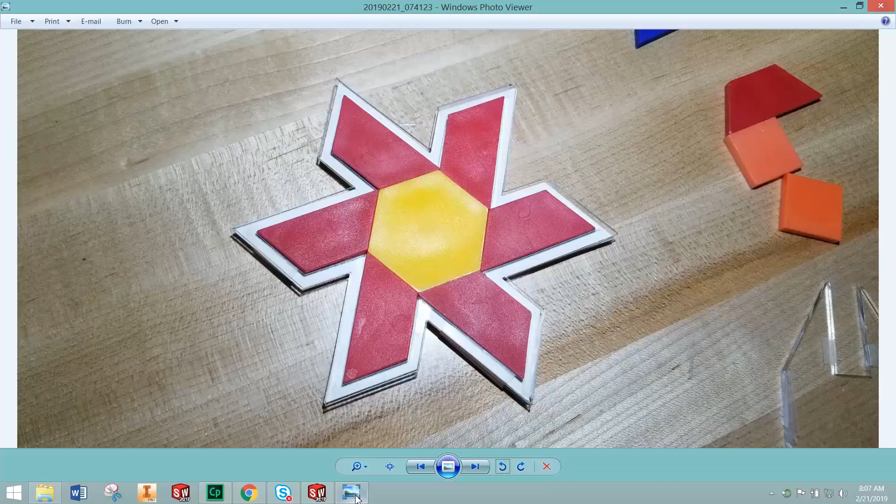We started this project a few days ago. We are using these pattern block colored geometric pieces to create a 2D puzzle that has a background and a border or outline, where somebody will be able to take your different pieces and figure out how to make them fit inside of your template to create the overall design you selected.

Here's the beginning of my example. It is supposed to be a flower, but I cut it off short, so it doesn't have a stem or any leaves on it. It should be missing some green parts for the stem and leaves, and I'll show you that in my example as we walk through how to do this.

You'll then use this picture, and some parts you'll download and assemble in SolidWorks, to create a background or base and an outline or border. These make up the two separate pieces you're going to design and laser cut in this class to create your pattern block puzzle. Your pieces will fit inside the border or outline and on top of this background.

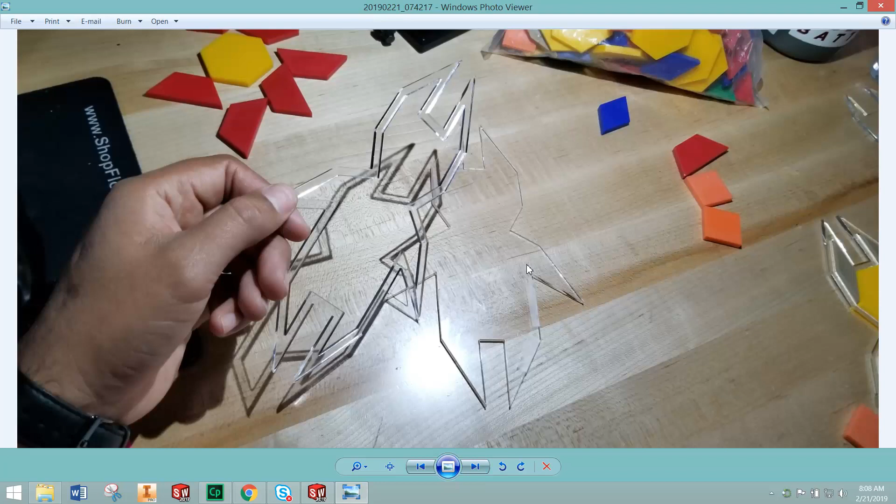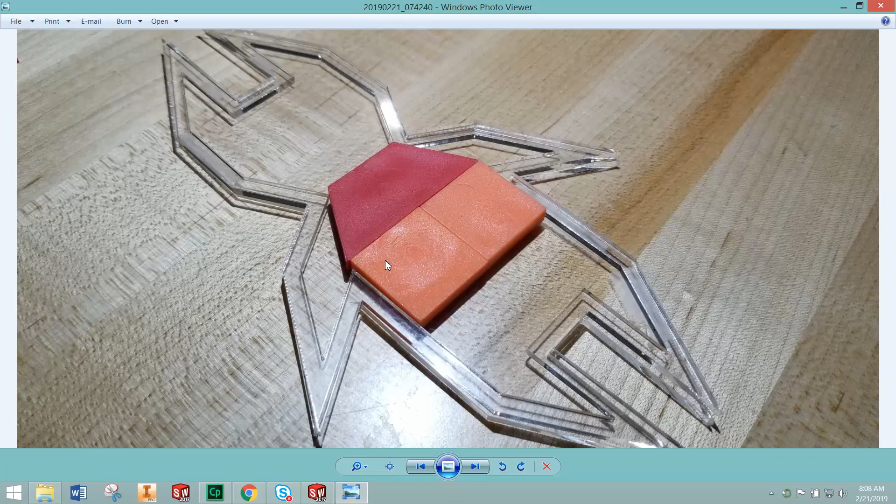Here's another example. You can see two different pieces. On the left hand side in my hand is the outline or border, and it has the same exact overall profile or shape as the base plate. These will be attached on top of each other to create the overall puzzle, then handed over to somebody to try to figure out your puzzle and how to make the pieces fit inside it.

To get started, one thing you'll need to do is go on GrabCAD. If you're in my class, you should already have an account on GrabCAD, G-R-A-B-C-A-D, grabcad.com. It's an awesome CAD, or computer design, file library with a bunch of different things.

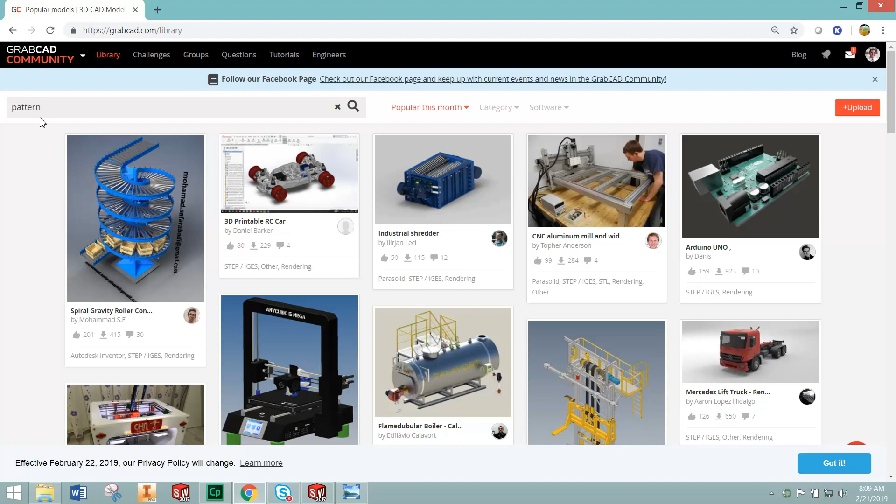One of the things on there for you guys, which you'll find if you search for pattern block, is these two sets of files that I have made available for people to download on GrabCAD.

One quick tangent: when I first put these up for you guys, this tan or beige diamond actually had the incorrect angles, and I uploaded it again. If you are going to use this tan or beige diamond in your design, make sure you download the separate file called pattern block diamond.

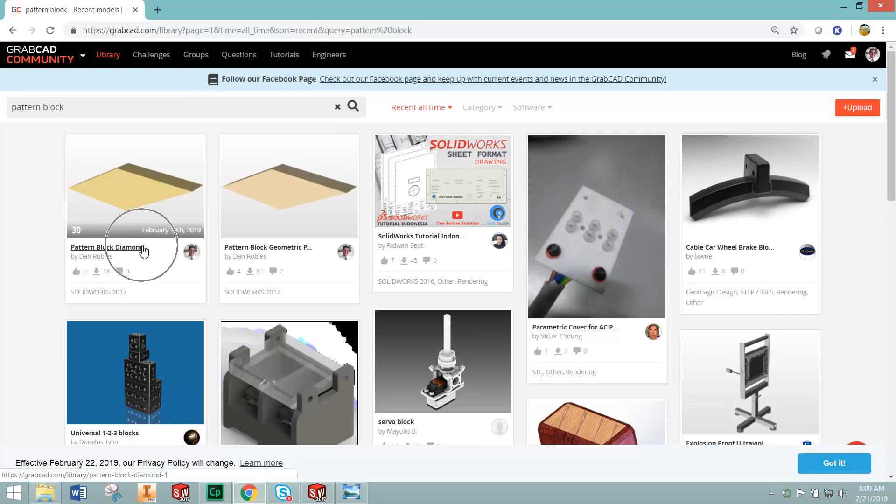Right now we're only going to worry about downloading these pattern block geometric pieces. When you go to this on GrabCAD, you'll notice I put a couple of instructions or bits of information on there.

One is that these are all sized the same, like every side of these pieces — one side of a square, one side of a rhombus, the side of a triangle — every individual side length is 0.972 inches. These are supposed to be a nominal 1 inch, but they actually measure about 972 thousandths.

We don't have to worry about that any further, because we're actually going to use these pieces in SolidWorks to create your design.

So you're going to be downloading these. Make sure when you download them, you put them into a folder that you know the location of. Do not work out of your downloads folder.

In this case, I've just put them on my desktop for now, just to make it quick and easy. Do not do this. You should be putting them in a folder for this class, or for period 1 or period 2, whatever you want to call it, as long as you know where you're saving it.

In SolidWorks, we are going to be assembling these pieces. When you create a new file, you have the option to create an assembly, to create a part, or to create a drawing. If you're designing an individual part, you'll notice the icons, as I've shared before on SolidWorks, are very representative and illustrate what you're actually doing with that tool or task.

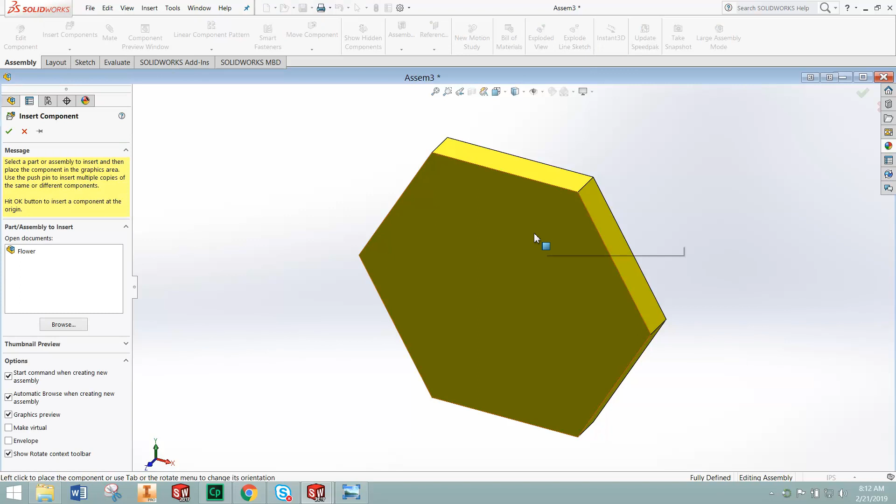The next part that I'm going to insert for this assembly is the red petals of my flower, which is made up of the trapezoid red piece from the pattern blocks. I'm going to bring that into my design.

You notice right now it's kind of just attached to my mouse. Wherever I move my mouse, that goes. I'm going to go ahead and click it somewhere close to where I want to put it.

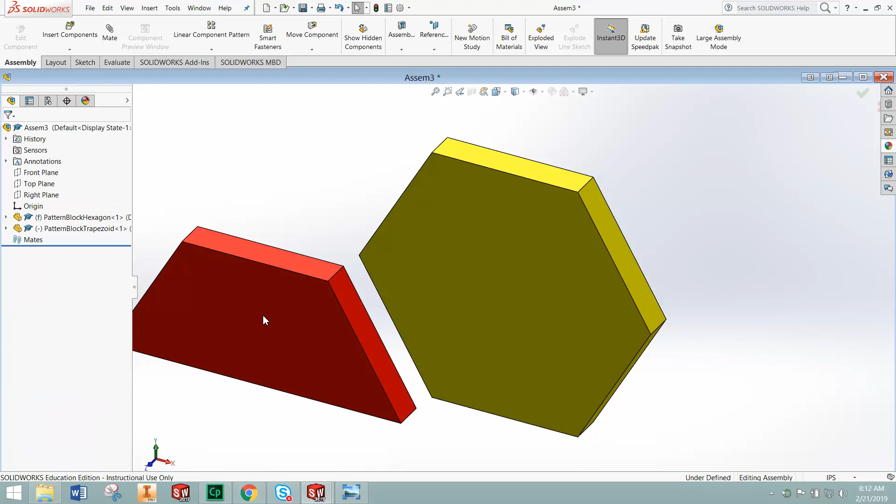Now the next step is to mate these, or attach these. This icon is super representative of what you're doing. You might have heard of a paper clip, used to attach different pieces of paper together, and we're going to use that quote-unquote paperclip tool, or mate, to attach these pieces together.

If I was actually holding these pieces on my desk in front of me, I would be bringing this face or surface of the red trapezoid over to touch this side of the hexagon to match those up to where I want to put it. That's actually what we're going to do in SOLIDWORKS.

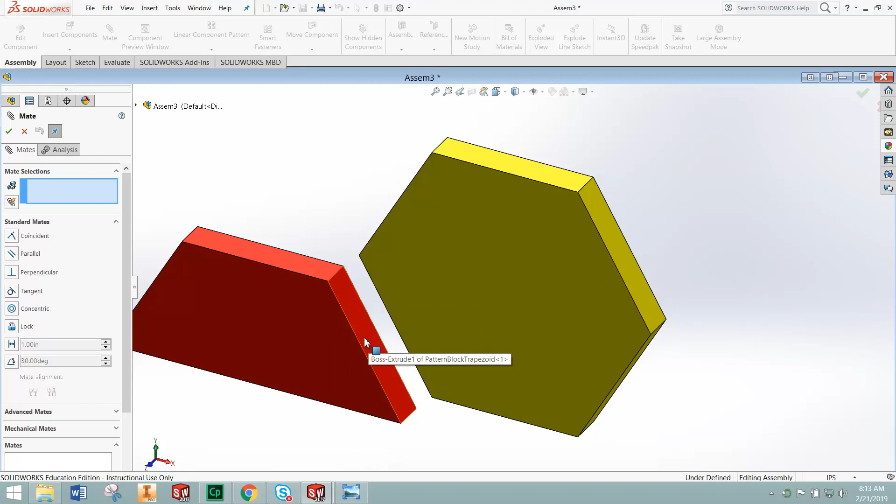So I've opened up Mate. It's up here, Mate. I'm going to select this surface, one side of one shape, to the other side of the shape on the skinny profile where I want it to go. Green check mark — so this is one mate.

Please keep in mind you always need at least 3 mates to completely attach any piece that you're attaching against something else, unless it is a cylindrical object. So that's the first mate.

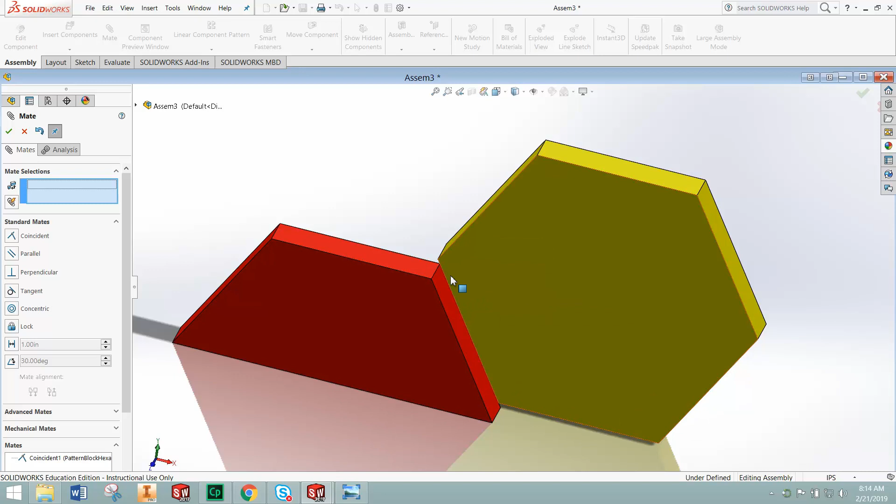Next I'm going to level out this surface with this surface to make those in line with each other. That is the second mate.

Lastly, I'm going to mate these two edges. I want these corners to be lined up, and you are going to do exactly that — line up those corners together, corner to corner. Make sure that you are selecting the edge.

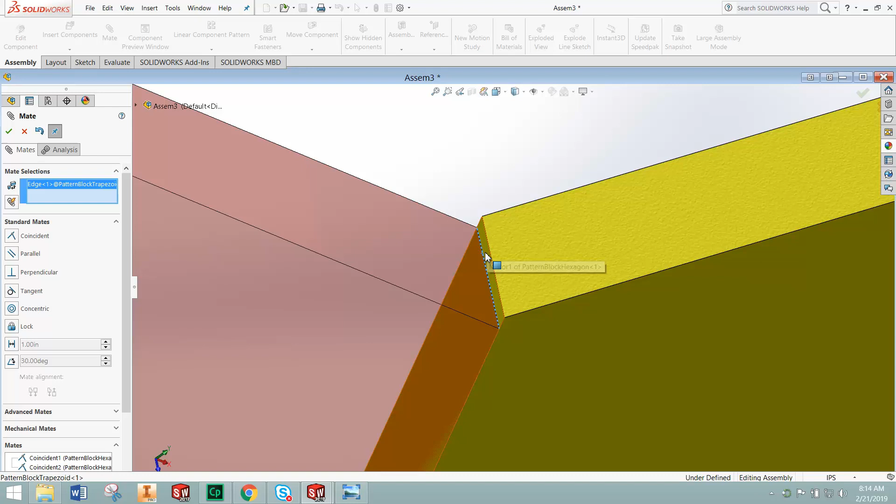Do not select a point. Do not select the point in the corner of the part. Make sure you are selecting edges. You can see here that whole edge on this part is being highlighted. So edge to edge — that is the third mate.

I can press the green check mark twice, and now if I look at my overall assembly, these two pieces are completely locked into each other and mated and can no longer be moved. If I try to move them, SOLIDWORKS will tell me this component is fixed, fully defined, and cannot be moved.

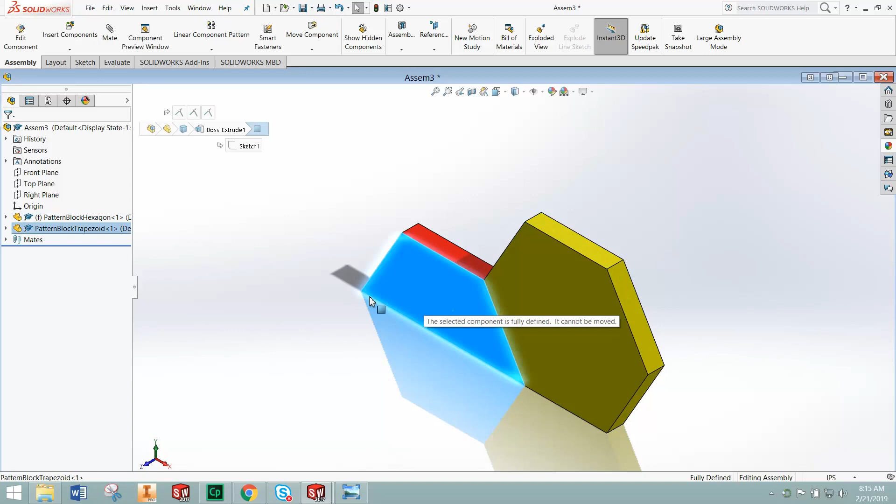You're going to repeat that process until you have completely assembled all of your pattern block pieces to create your full design. So here's my full design. I intend to create a flower. It is made up of 1 hexagon, 6 trapezoids, and 3 green triangles.

That meets my design constraints for this project: a maximum of 10 pattern block pieces and 3 different colors, and they are all touching at least one other piece to create one continuous shape.

Once you have your assembly done, please make sure you do this, and you should probably do this at least every few minutes along the way: click that save button. If you don't, and SOLIDWORKS crashes or your computer dies or you lose internet, you will not be able to save this. So make sure you are saving all the way along the process.

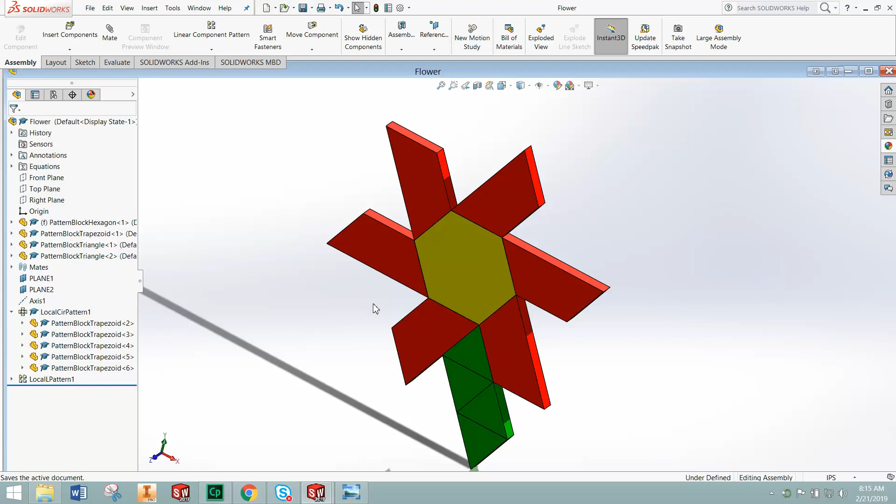Once you have your assembly done, the next step that we're going to go through to actually create your outline and then your background for your puzzle is to create a new sketch on top of this assembly.

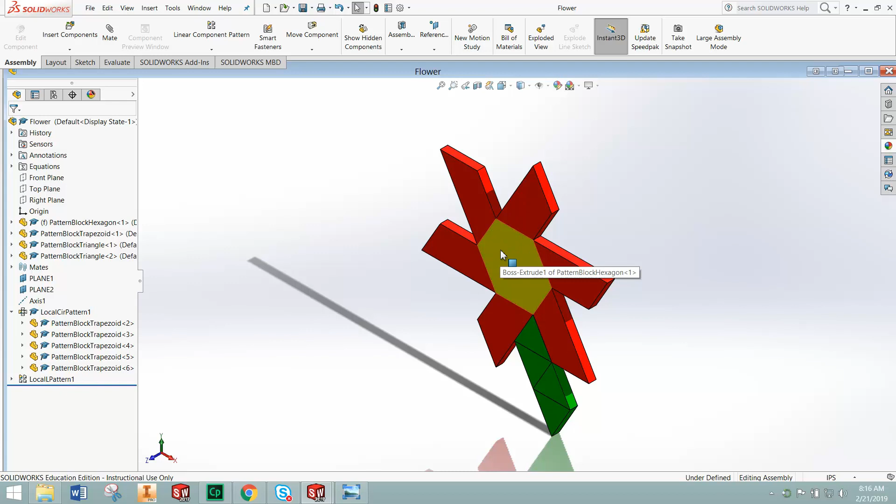So on the surface of any of these parts, you are going to right click, and then select this second button in the 3rd row. You can also left click actually, and it's the same menu that pops up. So it's the 2nd button in the 3rd row for sketch.

Make sure you are selecting a flat surface on one of these parts. So 2nd button in the 3rd row, sketch. I'm going to now, this is a hotkey, hold Control on my keyboard. It's next to like the Windows button, the top or bottom left corner of your keyboard.

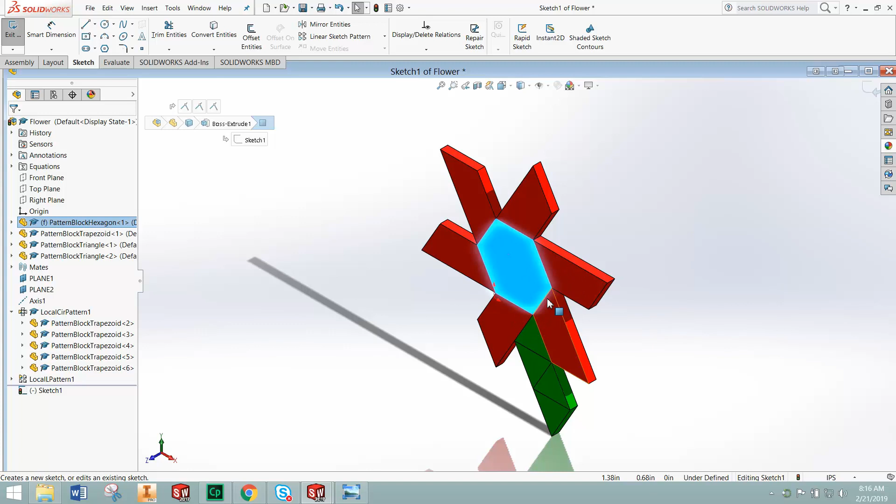So I'm holding Control on my keyboard and pressing the number 8. When I do that, SOLIDWORKS makes whatever I'm working with, in this case this surface I selected for the hexagon, flat to my viewing plane.

Once you've done this, you're going to trace the overall profile of this shape. The quickest way is to highlight all the surfaces of these parts and convert entities. The easiest way is to use the line tool, start on a corner, and work your way around, making sure the dot pops up on each corner.

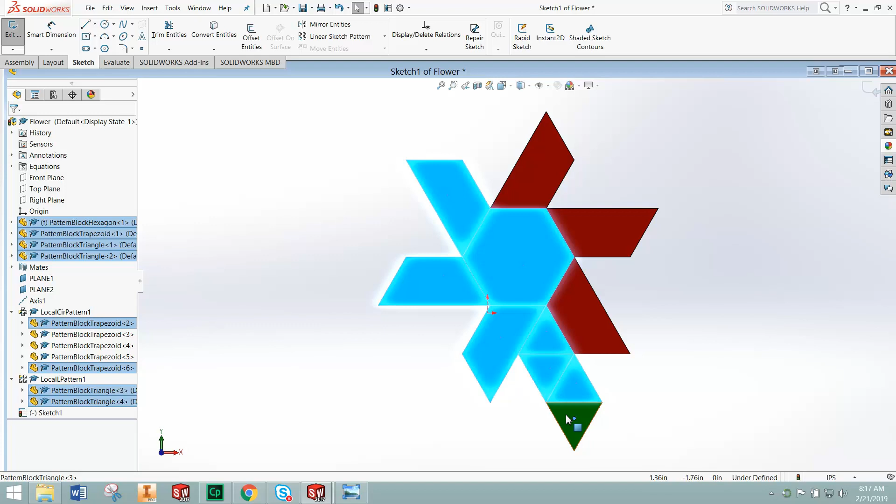For this video, I think it's going to take too long, so I'm going to do the shorter way. I'm going to hold Control on my keyboard and highlight by clicking every surface of every part in my assembly—not points, just surfaces. Make sure the surface is highlighted blue like this. I'm still in sketch mode, notice.

Then you're going to select, inside the Sketch tab, Convert Entities. SOLIDWORKS will automatically trace every single edge—pay attention to that—every single edge, not just the overall profile.

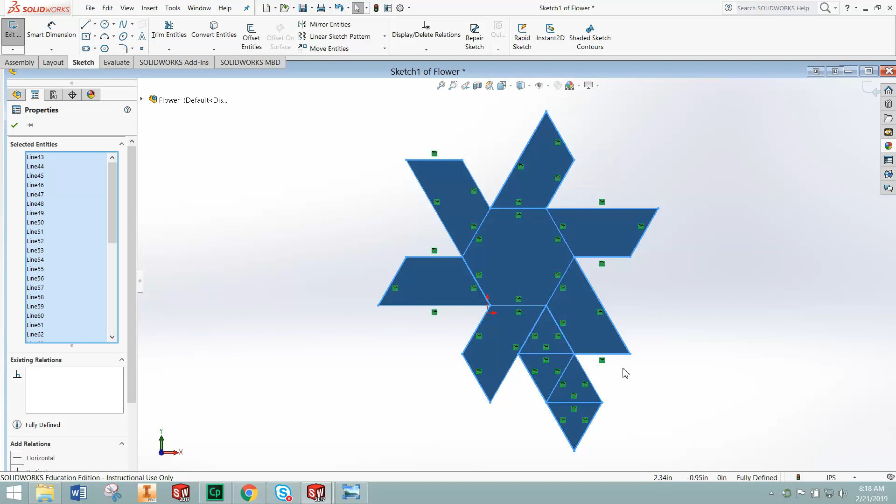So I'm going to copy all these lines that have been highlighted and turned into sketch lines. Highlight everything and press Control-C to copy it. SOLIDWORKS will say, hey, you can't copy solids, you can only copy your sketches. That's not really what it's saying, but it's what it means. You're going to say yes.

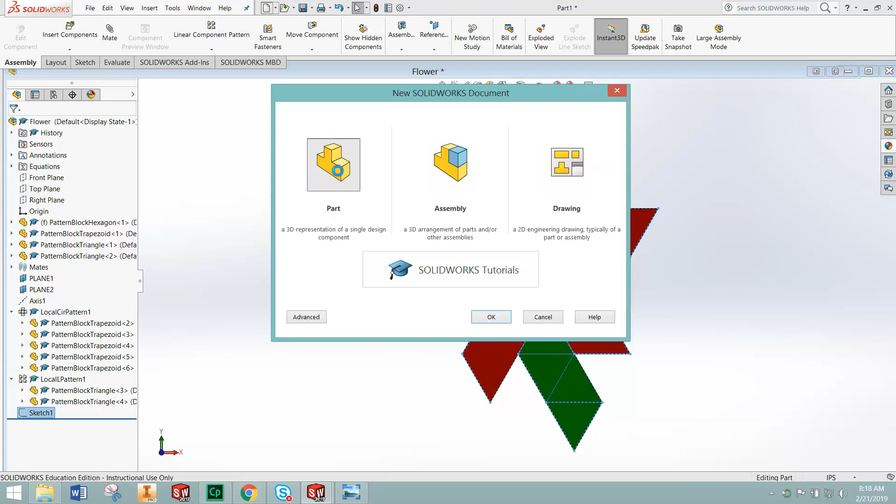You can exit the sketch mode with the green arrow in the top right corner, then go create a new sketch for a new part. When we create a new part, you're going to make a new sketch: pick the sketch button, pick the front plane, hover over your origin, and press Control-V. So there's everything I just copied.

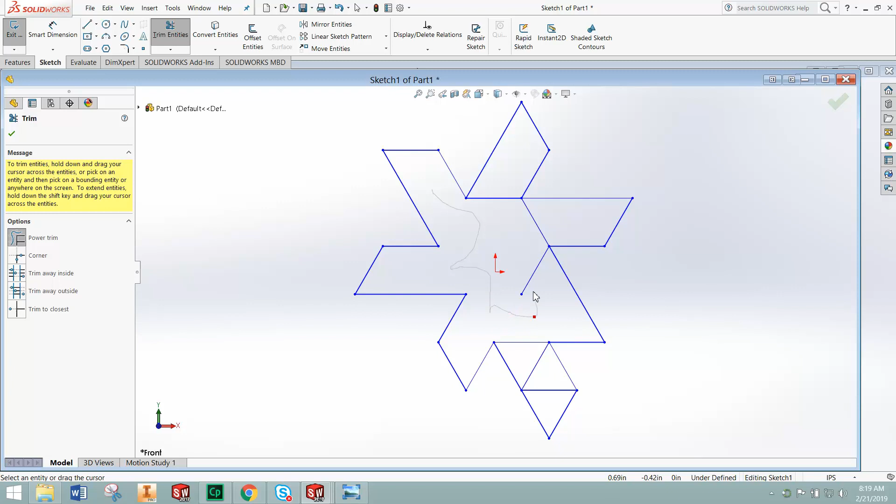Now, is this my overall outline of the shape? No, it has all these extra lines in the middle, and I'm going to get rid of those with Trim Entities—these little scissors. You click your mouse, hold it down, and slice through all the parts you don't want. Remember, we want to keep the overall outline of our shape, so I'm going to slice through all of that. Here's my overall outline. I'll press the green check mark back, and now I'm done with those parts.

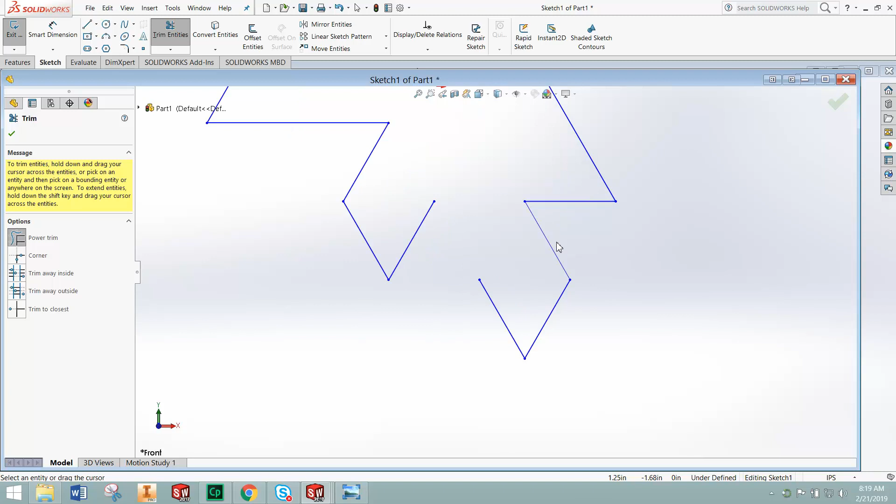Hey, look, there's a little gap here. I don't really want that. So I'm going to use Trim Entities again and get rid of those parts. I think that's the only place where that happened. I'm going to replace this line here. Okay, so I have the overall outline of my shape—kind of looks like a palm tree now instead of a flower.

And I'm going to go now to Features and create a 3D form from this with Extruded Boss. Once you pick Extruded Boss, you can click inside the shape if you want. Here's what you want to keep in mind: we are first making your outline.

Oh wait, there's one part I skipped that we can't forget. We need to give this some tolerance and extra space to make sure your parts fit. To do this, we're going to return to the Sketch tab and select the Offset Entities button. Make sure Chain is selected. We're going to offset, creating extra space of 0.01 inches all the way around.

So you click on a line—it's not picking everything, let's try that again. Offset entities, 0.01. Cannot create that off selected geometry. That's a shame. We'll continue for now, and I'll help you guys do that individually.

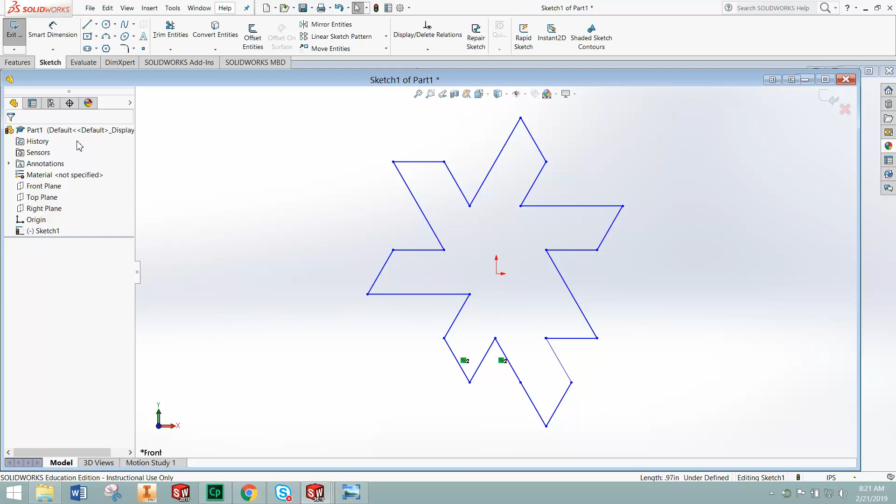So, Features tab, Extruded Boss. Click inside the overall shape. You're then going to select Thin Feature and make this 0.2 inches thick.

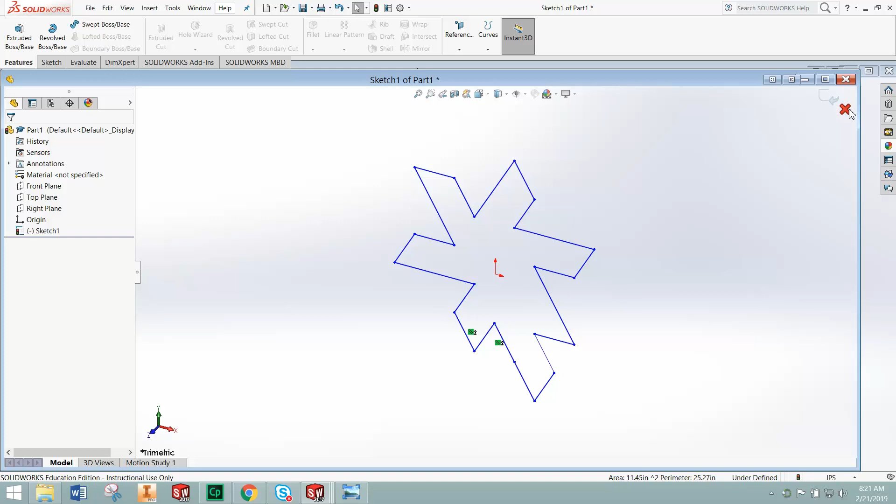Hey, something's going on here. Let's fix that—close this for now, don't save. We will delete that sketch.

Start a new sketch. We will use the line tool and trace the overall shape of our part—only the overall shape of the part, your overall perimeter or outline.

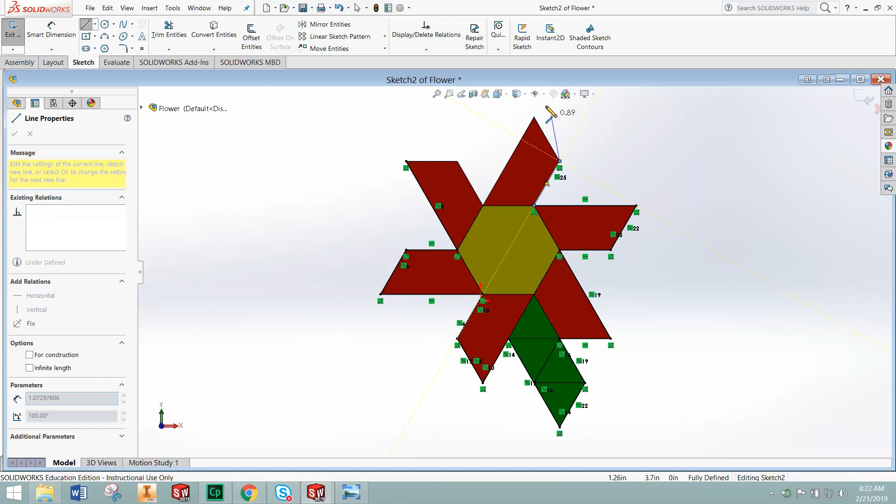So it goes to show, sometimes doing what should be the quickest way doesn't always work immediately the way you want it to, and sometimes you have to put in the work and make sure it comes out the way it's supposed to. I'm almost back to where I started, completely tracing this outline.

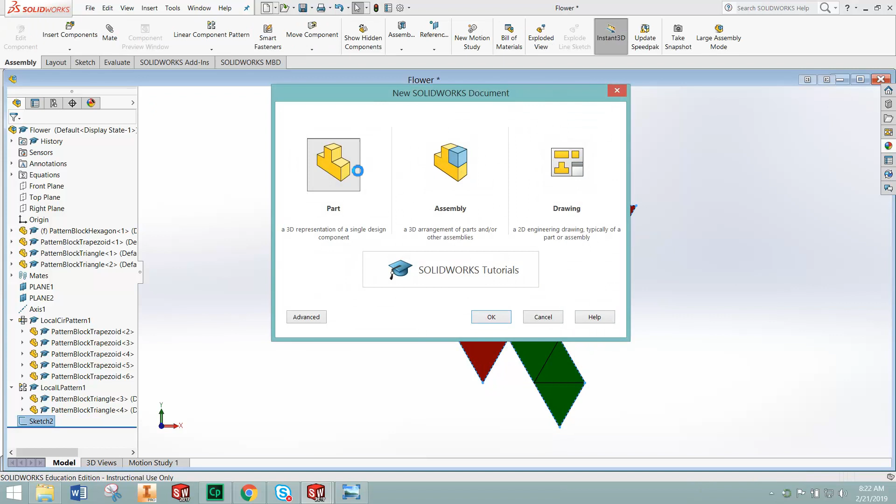There we go. I'll press escape on my keyboard, and now I can highlight everything. Control-C—again, still can't copy solids. Get out of that sketch mode, go start a new part with a new sketch on the front plane. Press Control-V, and we'll go straight to the Features tab.

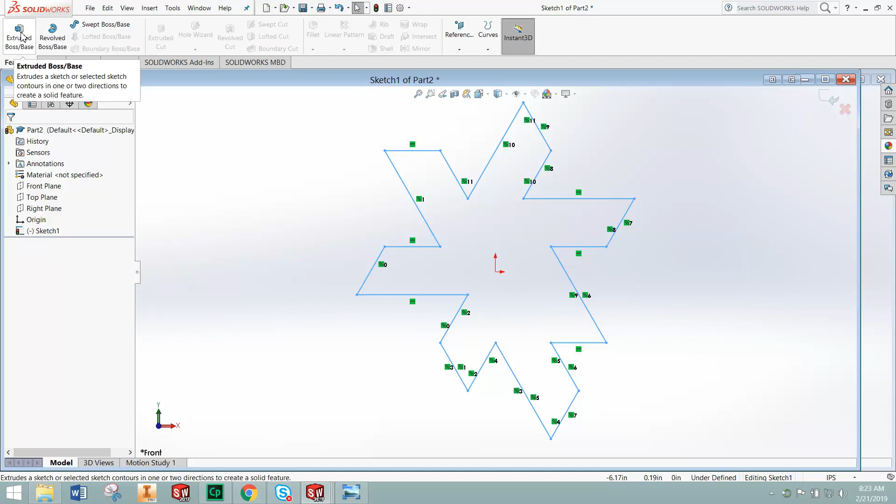So if you trace this line by line all the way around, it's always going to work. It takes a little bit longer, but as you saw, I just spent more time trying to make the shortcut work. So we're going to go straight to the Features tab, select Extruded Boss, Thin Feature, and make this 0.2 inches thick.

Green check mark, now this is done. This is the complete outline of your part, the border that is going to contain your puzzle pieces on top of the background.

So we are going to go ahead and save this file, save as. Make sure you're selecting save as. I'm going to save it on my desktop because that's where I'm working out of my computer for this example. And this is my puzzle outline.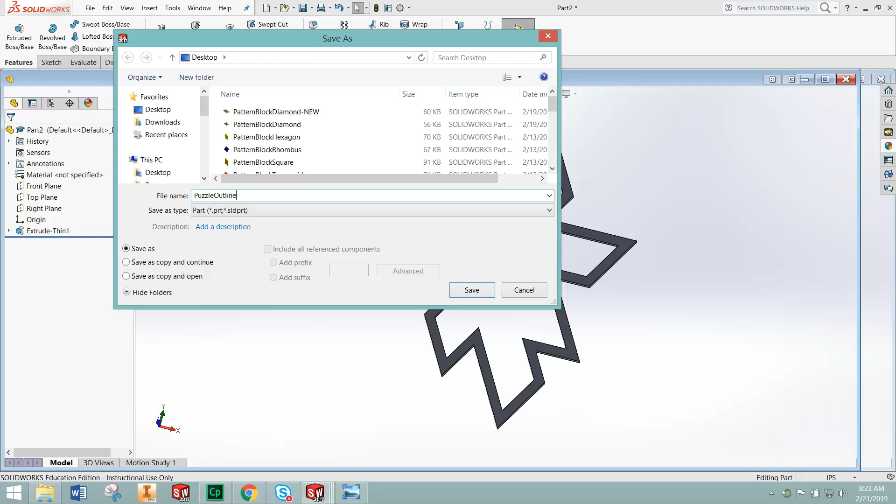That's done. Next, I'm going to use this same puzzle outline to create my puzzle background. Now the background has to be a solid shape, right? So make sure you're paying attention to this part here.

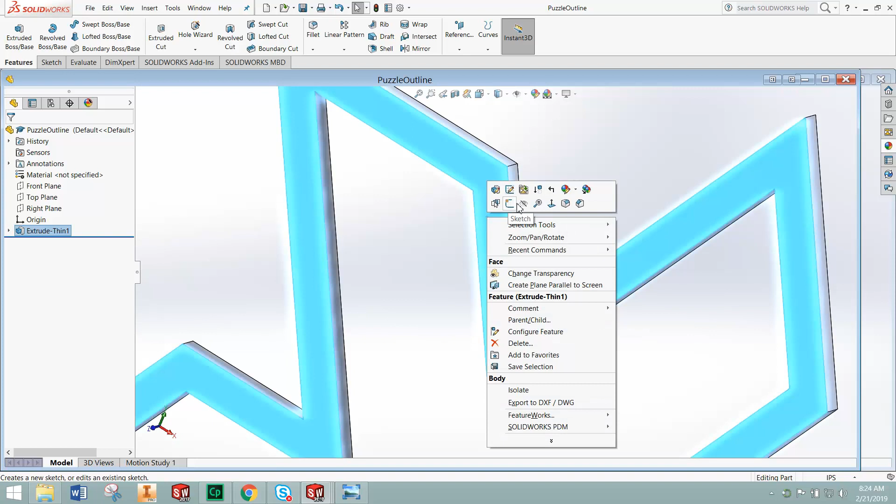I'm going to right click on the flat surface of my puzzle outline, right click, second button in the second row for sketch. I'll press Control 8 again here to make the part normal to my screen. And then we're still in sketch mode here. We're going to select Convert Entities and then go back straight again to the Features tab and Extrude.

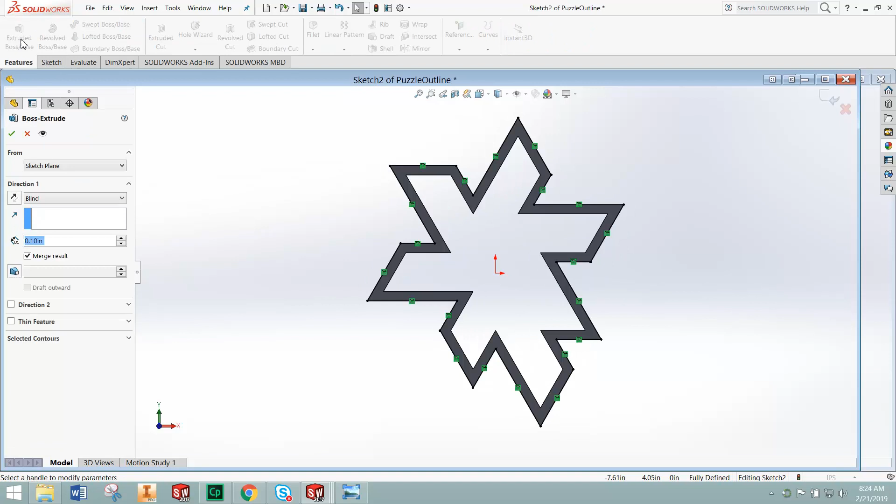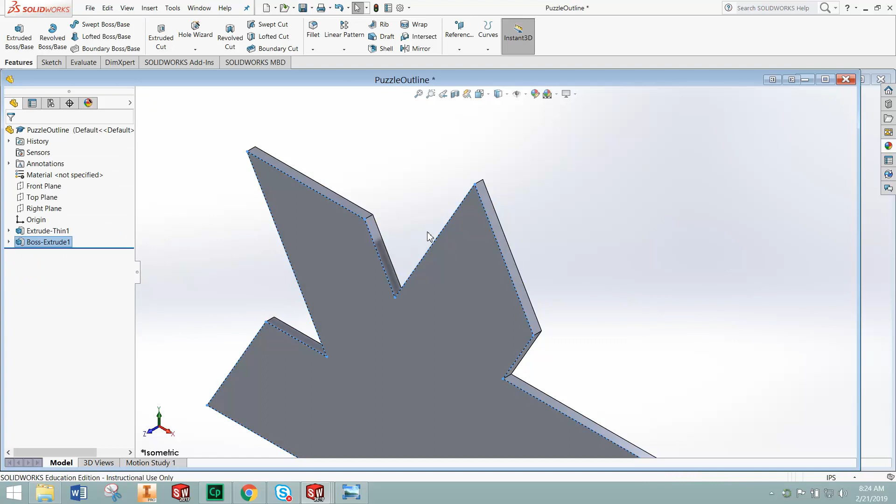And then this time, instead of doing a thin feature, we are going to make this just a solid all the way around. If you pay attention, this is actually making it come out of the part, and we want it to be together with what's already there. So we're going to reverse direction, green check mark, and now my background is completely done.

Now repeat the process we just did about 30 seconds ago. Save as, and this is now my puzzle background, or puzzle base.

Now I'm done with these parts. I only needed to design two parts after I put everything together. One is the base, the other is the outline, which I have here as a separate part now.

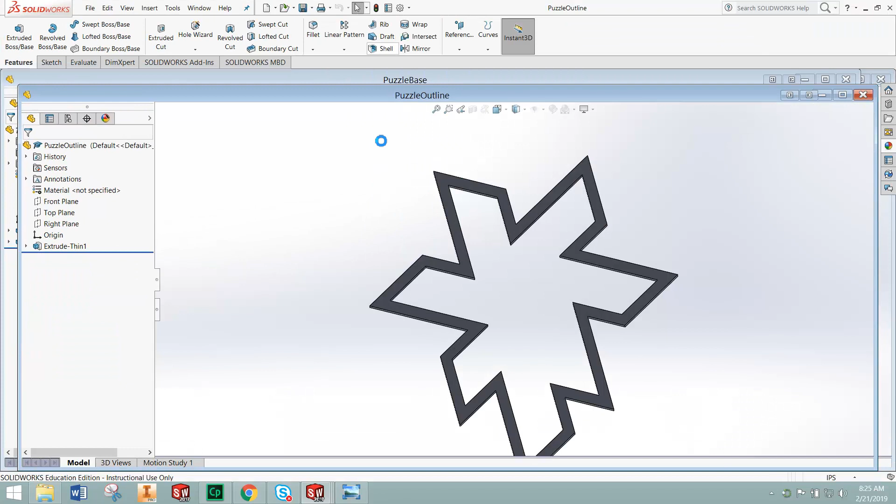Part of what you're doing to get this turned in and to be able to laser cut it is this last and final step. So when you're done with this, take screenshots with the snipping tool and add it to your assignment, that's all part of this project. That's all fine and dandy, and that's part of you getting your points for this project.

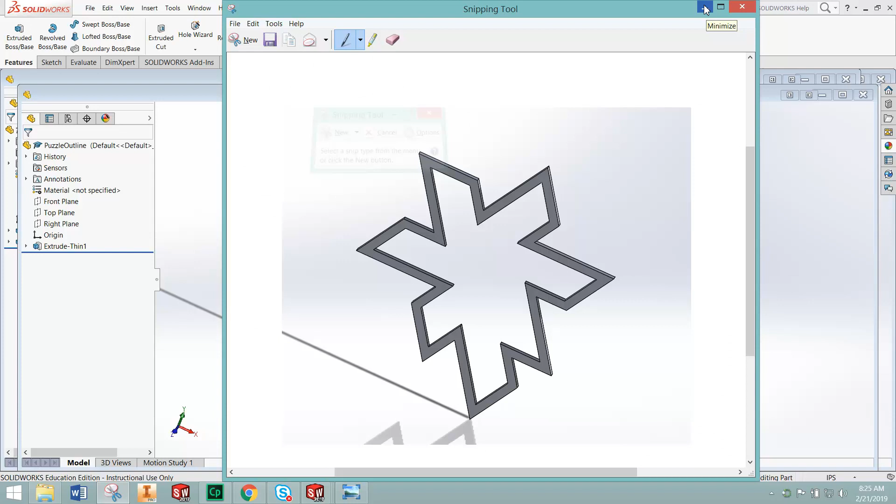But we cannot cut pictures like this on the laser cutter to make it fit the way it's supposed to. So make sure you do not forget the most important part at the end: to finish this project, you need to convert these to DXFs. You do that by right-clicking on the surface of a part, any flat surface, then export to DXF.

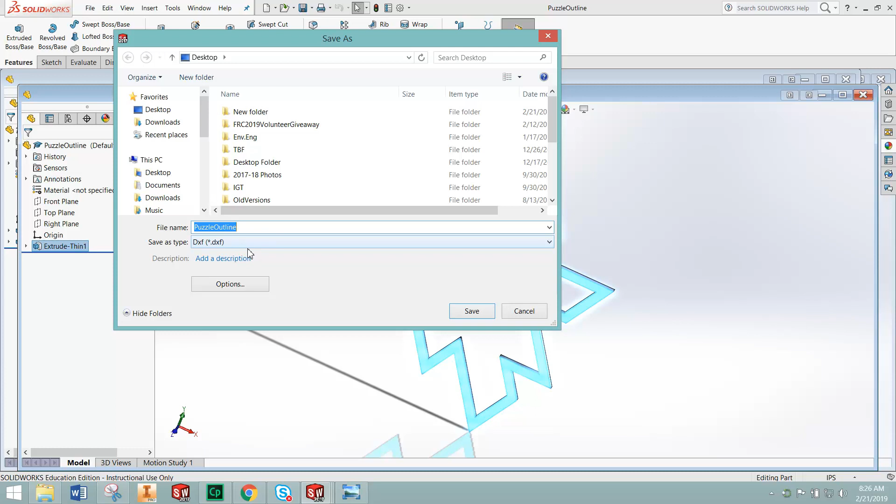Now these are part of the things you're uploading to Google Drive and also attaching to your document for this project. You'll notice the file name is the same, but now the file extension is different. It's a DXF now, and that's what we use on the laser cutter to cut these parts out of plastic and foam core.

So we'll save that. It's going to ask you for some options. You don't need to mess with any of those right now, just click the green check mark. Then SOLIDWORKS gives you a preview, in black and white. You press save, and now that DXF is saved and ready to turn in to get laser cut.

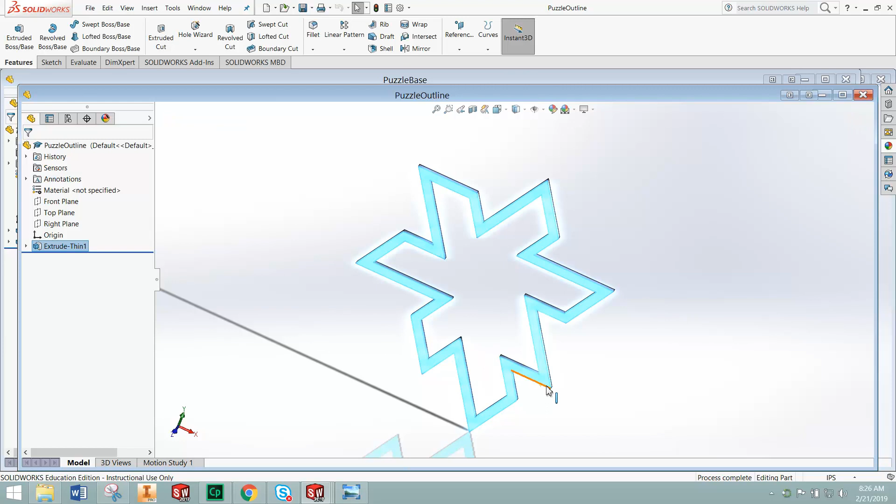You are going to repeat that same process with your outline here.